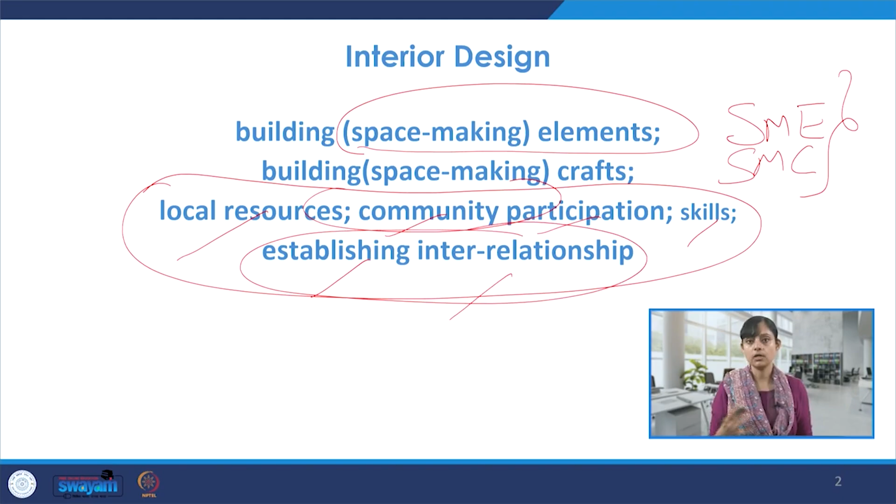So like I said, SME or building elements, SMC or building crafts, space making crafts, and whenever we talk about these and understand the conceptualization of space or interior architecture projects, we try to understand the role and contribution of all of these, and also the interrelationship among all of these put together.

So these are the contents. For space making elements, we had already started discussion and saw this table, but just to summarize again, we have architectural elements, interior elements, and ornamental elements. All of these interior and architecture elements put together make a space, and they are called SMEs or space making elements. These categories have been adopted from prior research, and it's also part of my PhD research at IIT Roorkee, where there are more details for anyone interested to look at.

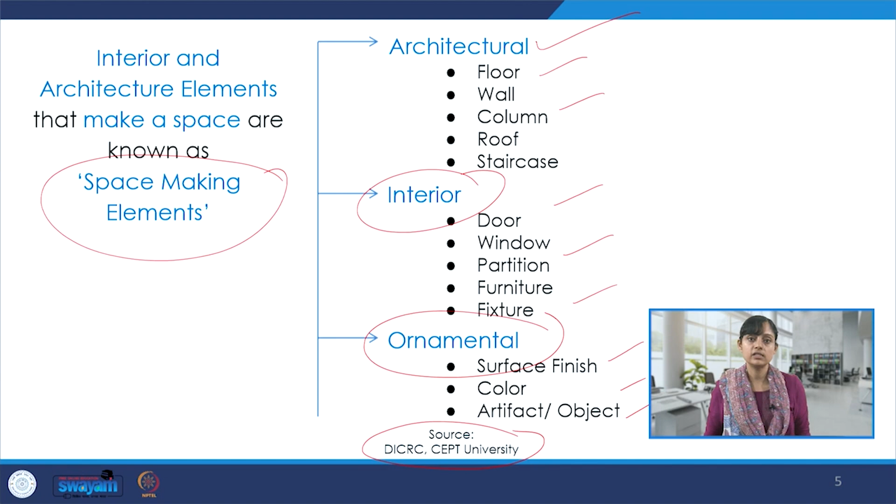Since we already discussed a lot about these elements, I'm going to talk a bit about some of their attributes and show some visuals, rather than the technical definitions we have already seen.

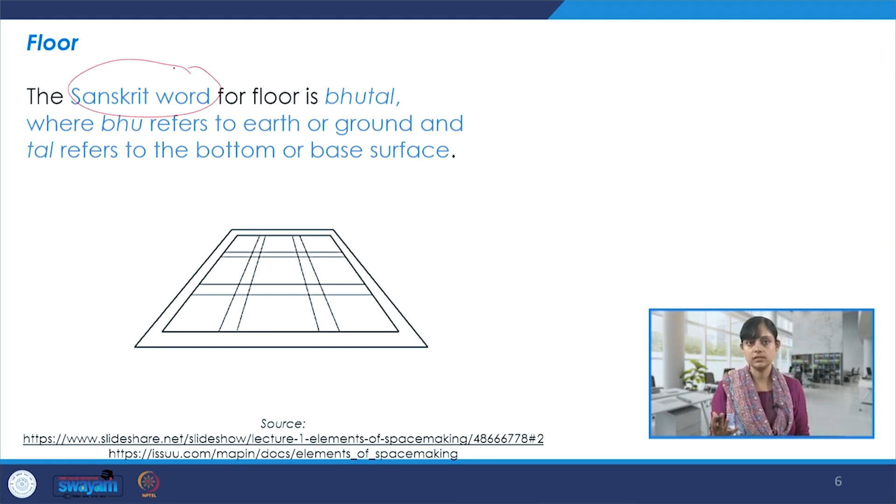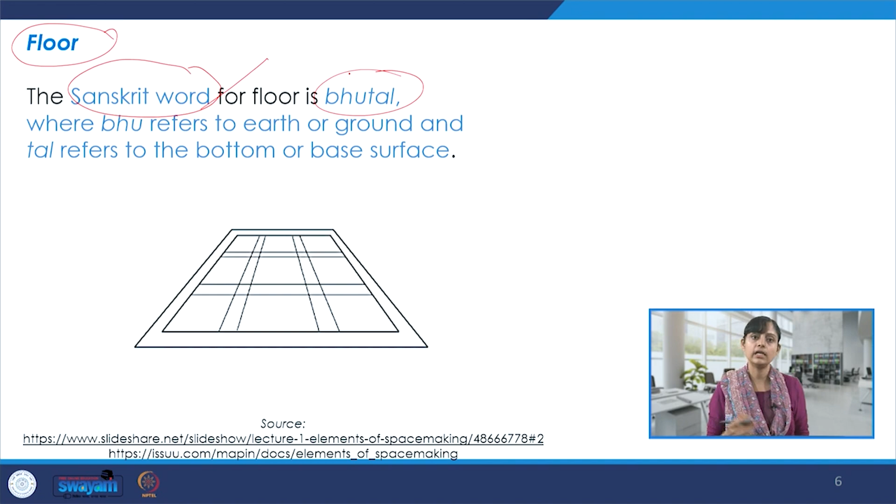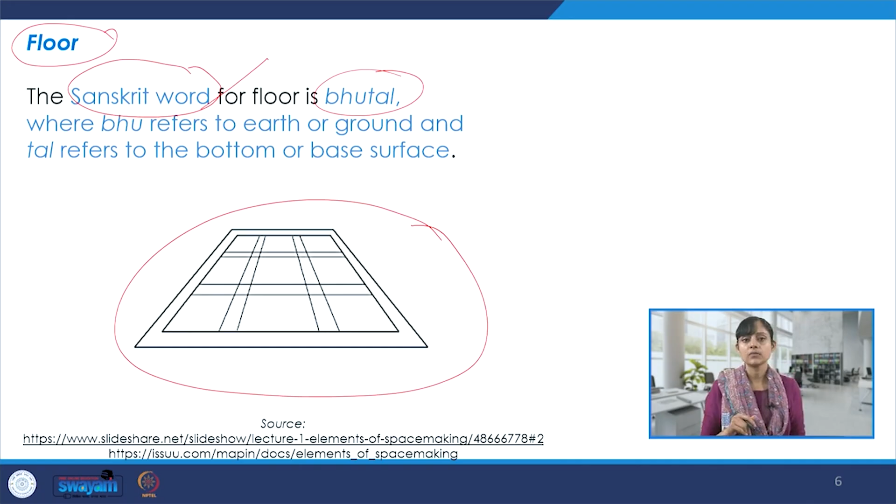So when I talk about floor, it's a very crucial element. If we talk about its origin, in Sanskrit it is derived from bhutal, where bhu refers to earth or ground and tal refers to the bottom or base. It becomes like an anchor point or reference, and we have to really see this as a very important element within interior architecture projects.

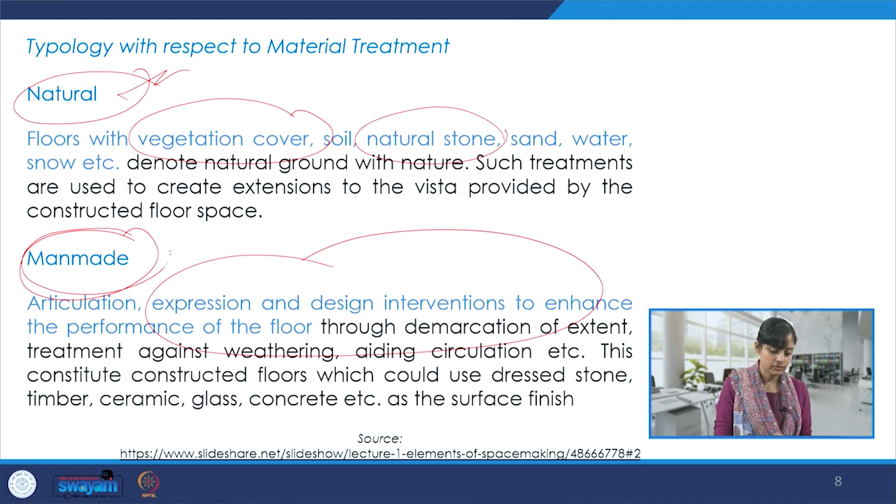It could be an unmodulated floor surface, very linear, consistent and uniform, or it could be something modulated with a play of levels. It could be something very psychedelic, very different from what we experience on a plane surface. It could be natural or man-made, with different kinds of articulation, vegetation cover as part of natural elements, or natural stone. We could design expressions, customize details, and do interventions as part of our skill sets to create different kinds of floors.

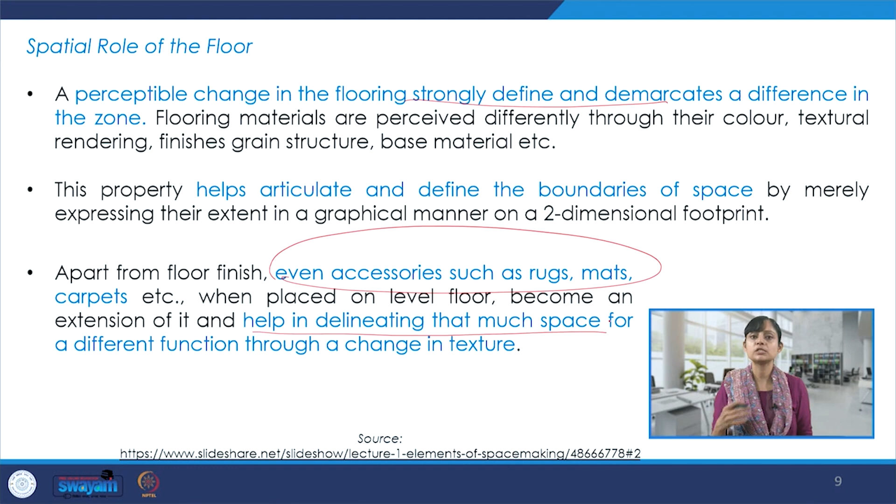There are different spatial roles that the floor plays. As we've already discussed, it strongly defines and demarcates different zones. It helps in articulation of spaces and defining boundaries within a space. Even accessories such as rugs, mats, and carpets help in delineating that much space for a different function through a change in texture or color.

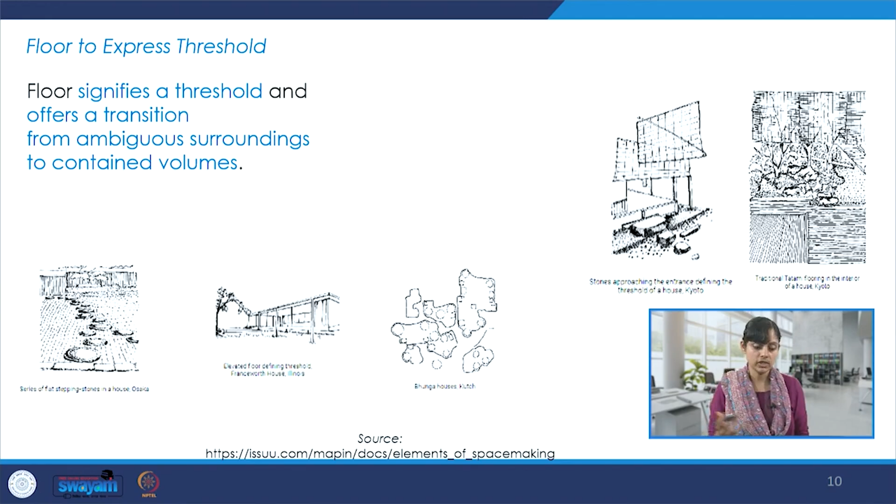There are different attributes these elements could assign to a space or project. For example, a floor could express or signify a threshold, offering a transition from ambiguous surroundings to contained volumes, like this series of stepping stones in a house in Osaka.

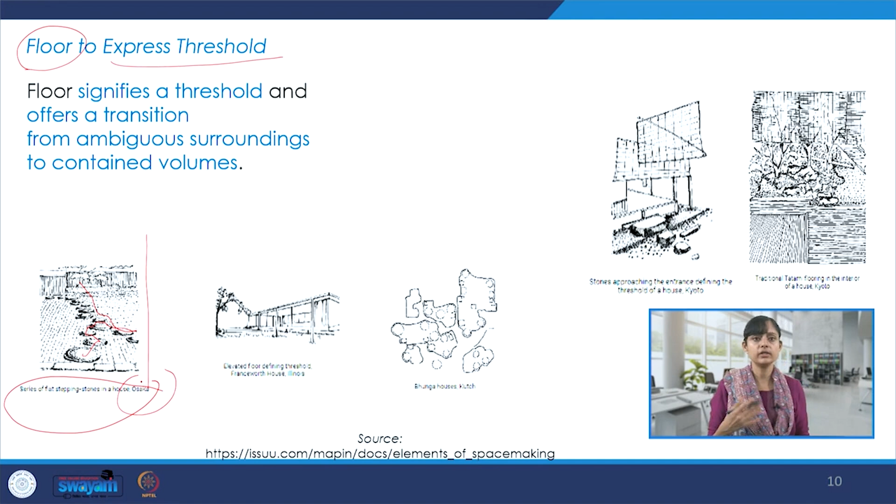So here it's again an expression of thresholds. This is an elevated floor defining a threshold, at the Farnsworth House in Illinois.

This is a Bhunga house of Kutch. We are seeing the plan. Here also we have very interesting details in terms of floor, where these stones approach the entrance. They make us approach the entrance and define the threshold.

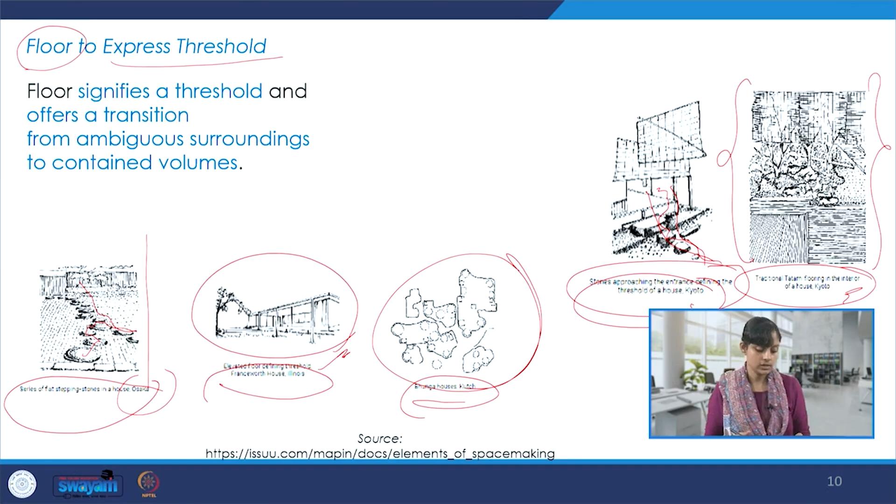This is a house in Kyoto. Here we see some traditional flooring in the interior house of Kyoto again, so it could express threshold and define volumes.

Then there is this application at Sangath, Ahmedabad, architect B.V. Doshi's office. Here we see how the floor is used for different purposes and what interesting role it has, defining a sequence of pause and movement. Without directly entering the office, one navigates through the space, following this sequence of pause and movement, and then is taken to the office.

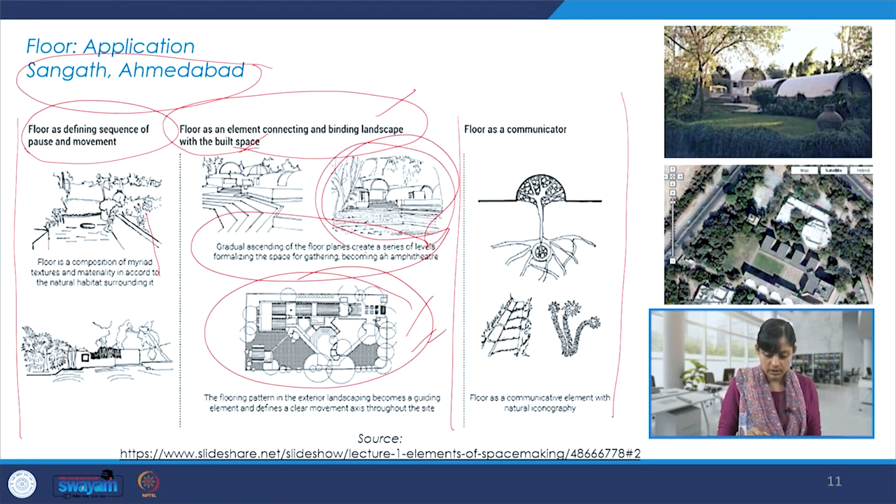That's also a sort of a journey, and floor plays an important role there. Floor again acts as an element connecting and binding the landscape with the built space. This is the exterior landscaping shown through this drawing and pattern, and here we see how it becomes a binder, cohesing the landscape with the built space.

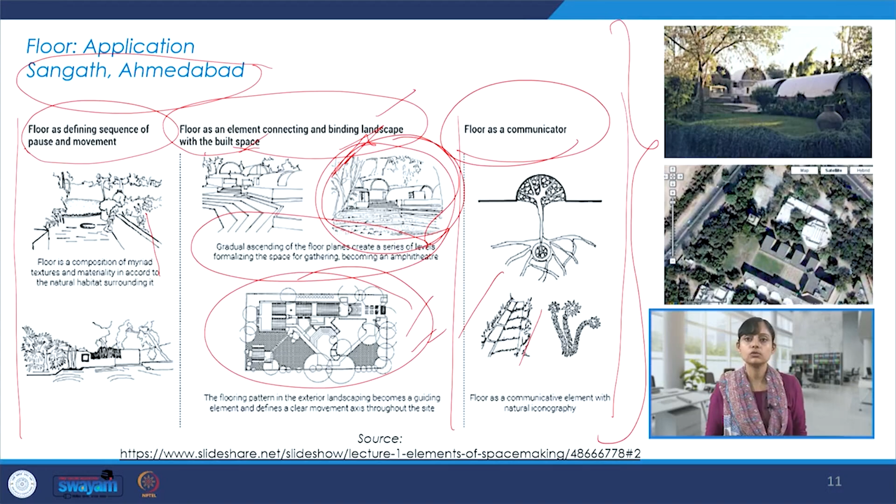Floor also acts as a communicator, the branching out of spaces, the kinds of stories one understands through these building elements. All of these are crucial aspects of design, also having philosophical underpinnings and some kind of symbolism and iconography, apart from the functional aspects. These are very interesting and important parts for a designer to understand.

This is the very famous Fallingwater in Pennsylvania, and here too we see how the floor becomes an important point, binding the entire exterior landscape with the overall built form and helping us navigate from one zone to another, through a series of pauses and movements and understanding a certain sequence within the space.

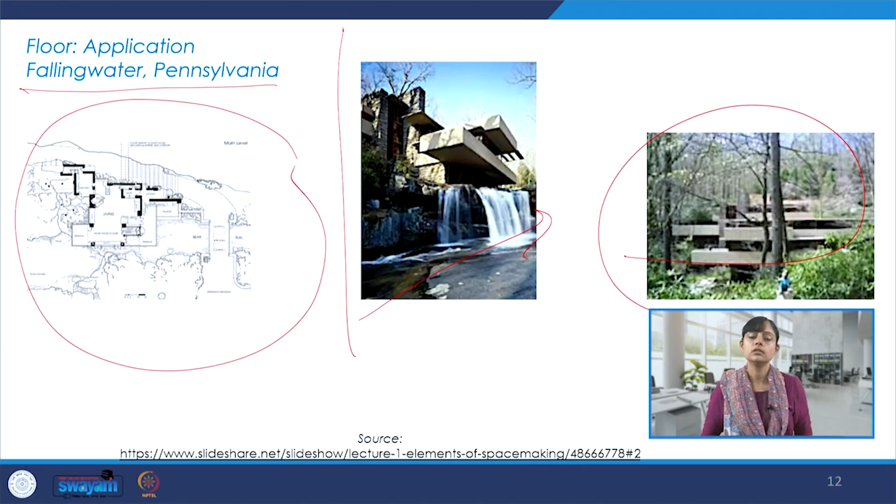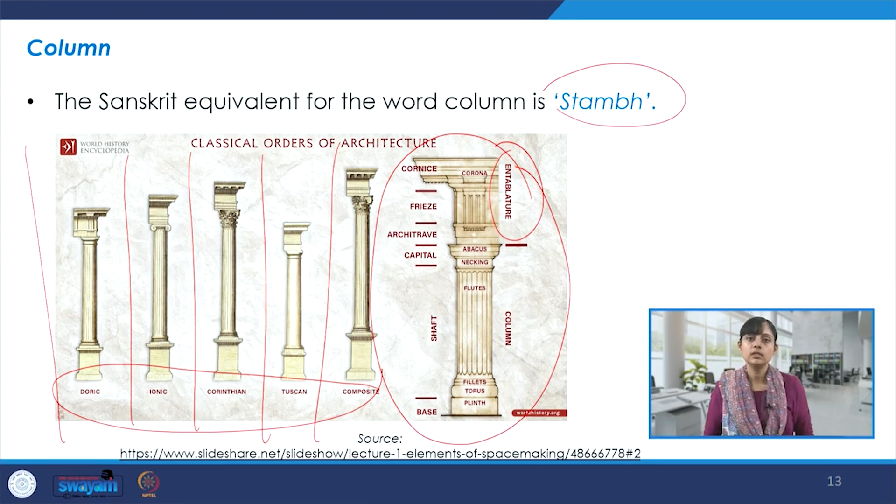Then column, and the Sanskrit equivalent is Stambh, and we already discussed the orders, the 5 kinds of orders. Here again we see these columns in place and the entire detail about the shaft, base, capital and entablature, and how they help conceive a space and what functions they do within a space.

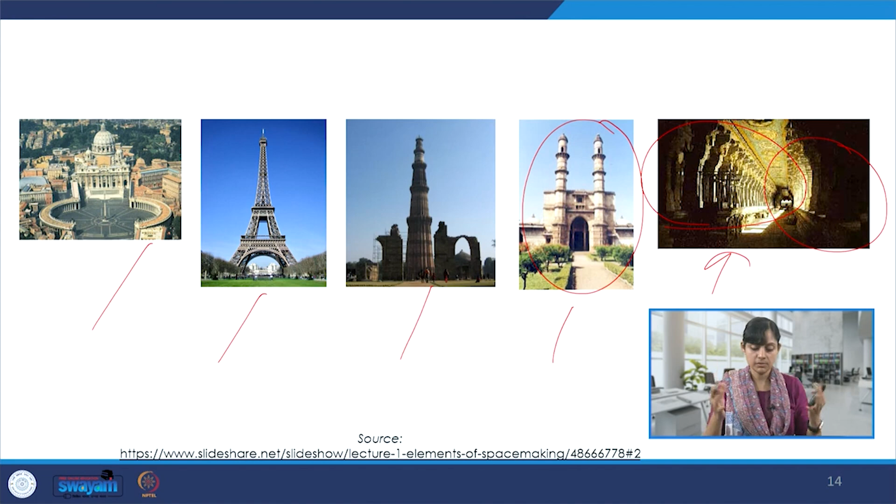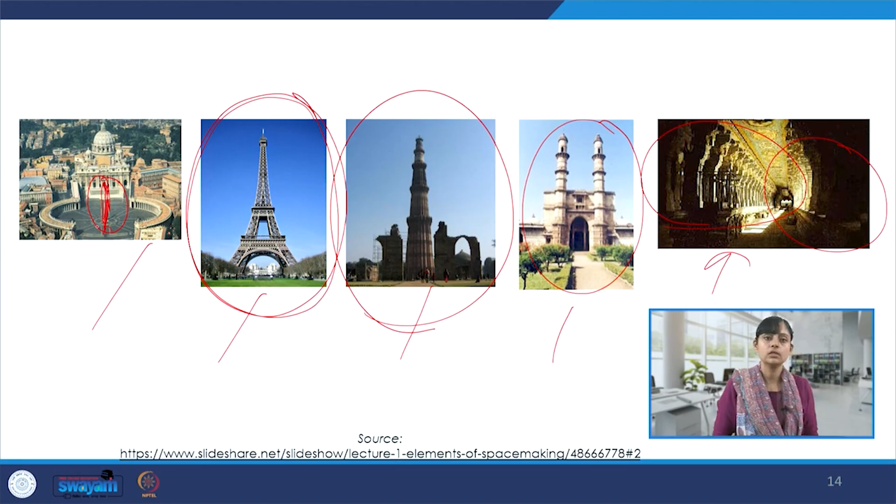Again we see some examples when we talk about columns. Here there is a repetition and a rhythm. Here we see these twin columns defining the grandeur and the main entrance, and of course landmarking. This is again a sort of landmark and a very historic example. And over here at the center, we see this interesting placement of a column.

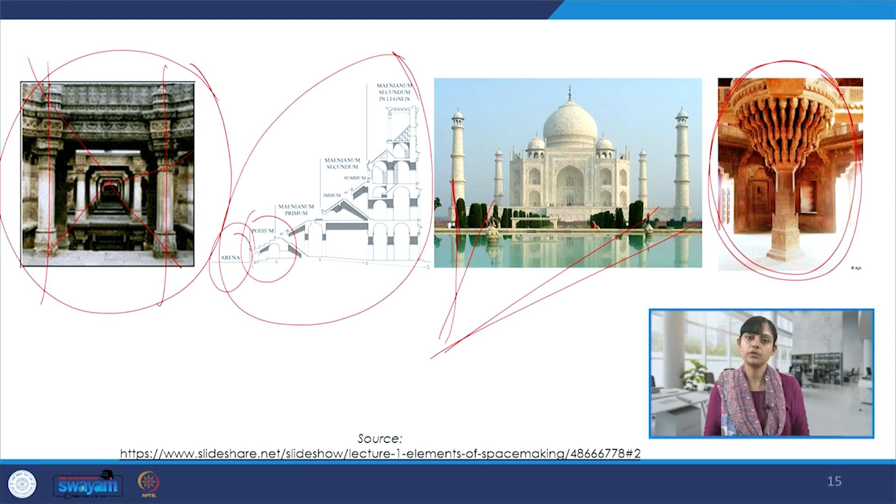Here again some examples, this is from Ahmedabad, and then you see the one-point perspective over here, a very interesting perception within a space. This is another example. Then we see the columns in the Taj Mahal, the minarets and columns, and of course a very interesting example like this. We also see contemporary examples like the Mumbai terminal and other columns used in contemporary projects, so they do a lot of different functions.

Then another SME is wall, and we see examples again. This one is from Gujarat, and again some very historical examples.

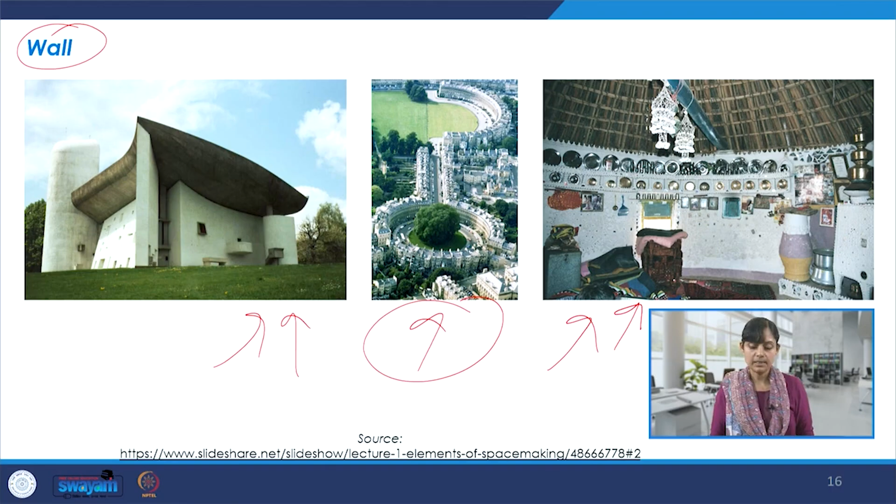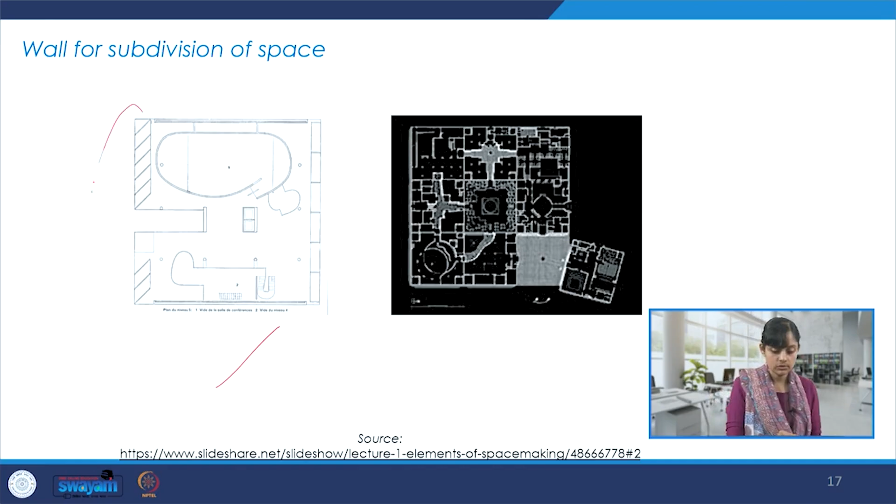Then again, what does wall do when it is about the subdivision of a space? So it has this attribute, and understanding the placement of walls helps us demarcate certain spaces, this zone versus this zone. And here again, within a walled city also, this sort of a grid and then the subdivision.

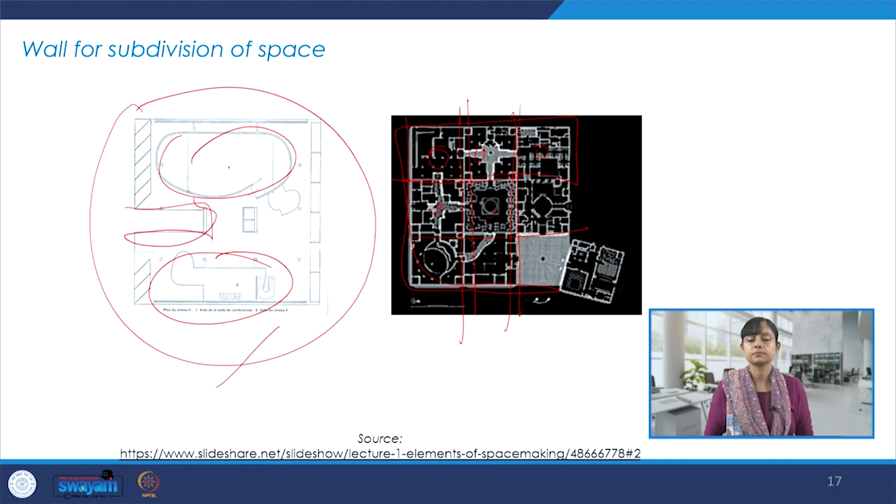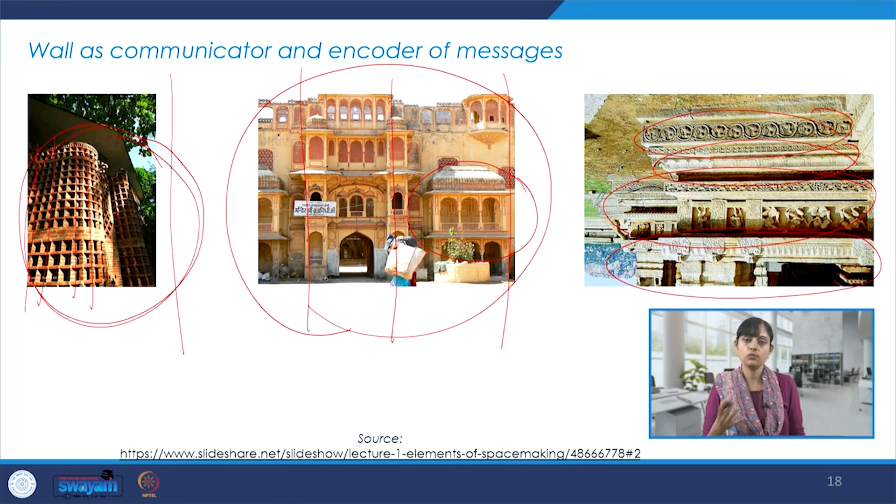Wall also acts as a communicator and encoder of messages. Here again it's a very porous surface we see, and this is the brick wall, done in a very interesting louvered pattern. This one over here again carries lots of messages, history of the place, important elements of a particular architectural style. Also, if there is any kind of epigraphical detail, something written or etched on the wall, or some kind of carving or motif denoting a certain meaning, those kinds of details also we see on wall as a building element.

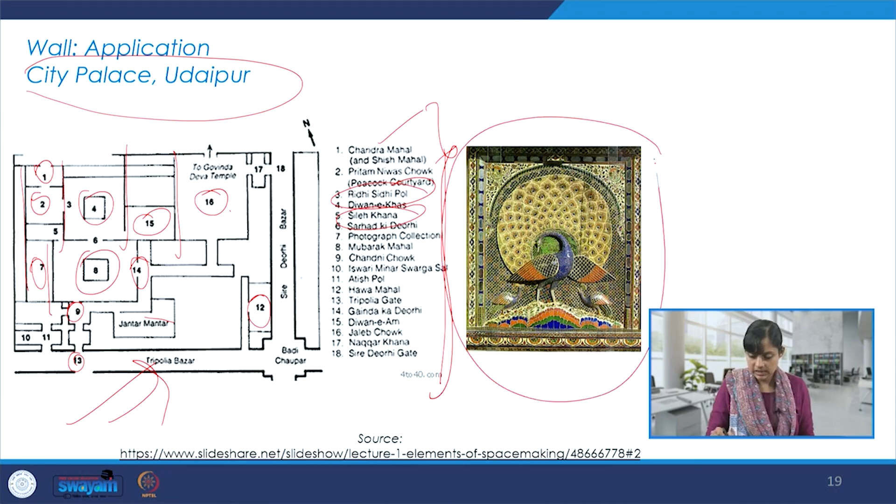And we see interesting details of mirror work and mosaic work or meenakari work within this palace at different eye levels on walls, which accentuate the space, creating drama and aesthetic. Plus it becomes a sort of communicator and encoder of messages from that particular time period, or where did this glass or mirror work come to India from, or whether we influenced it to be taken outside India, and so on.

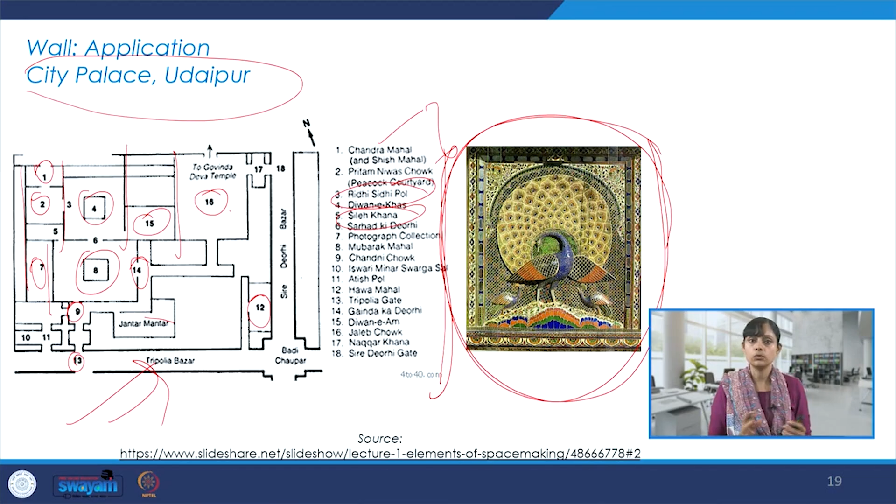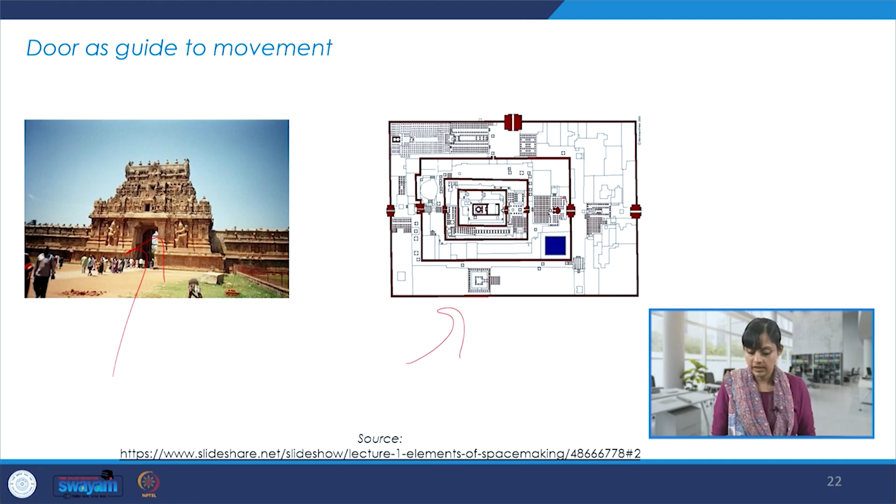Door also acts as a guide to movement, and it defines entrance, it defines movement, it helps us navigate. Within a floor plan, wherever we see door openings, it also gives us a sense of direction.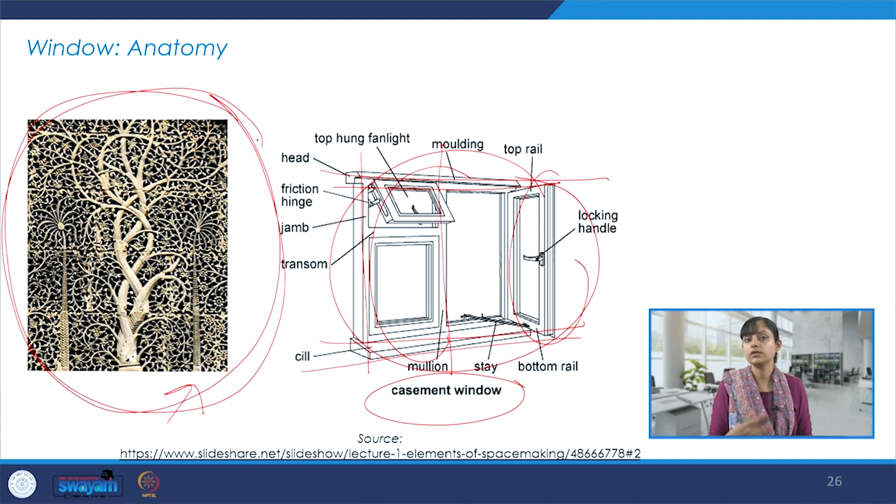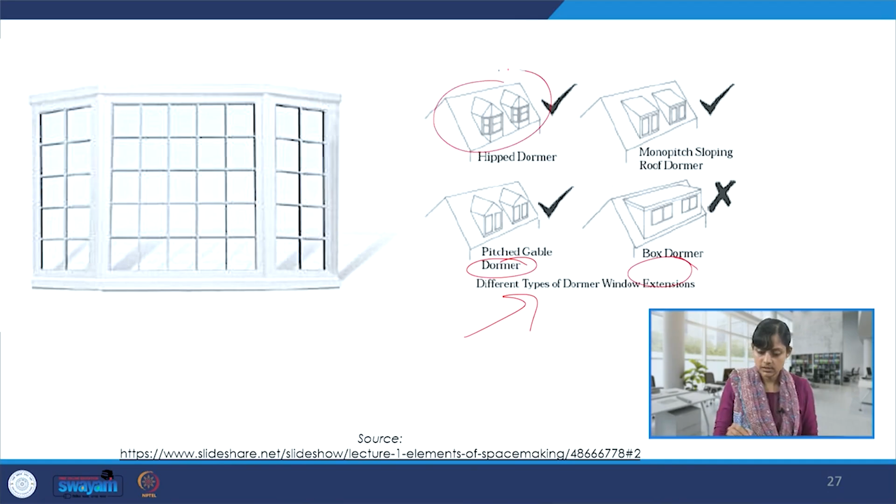Windows could be understood in terms of anatomy. It could be like a perforated window, or it could be like a casement window, which has a proper structure and system in place, where we have the top rail, bottom rail, and all these details. Or it could be something very abstract, intricate, with perforations, with lots of motifs and patterns. So, perforated. Then there are other examples: this is a dormer window, here we see the roof and the window at an angle, and this is like the bay window.

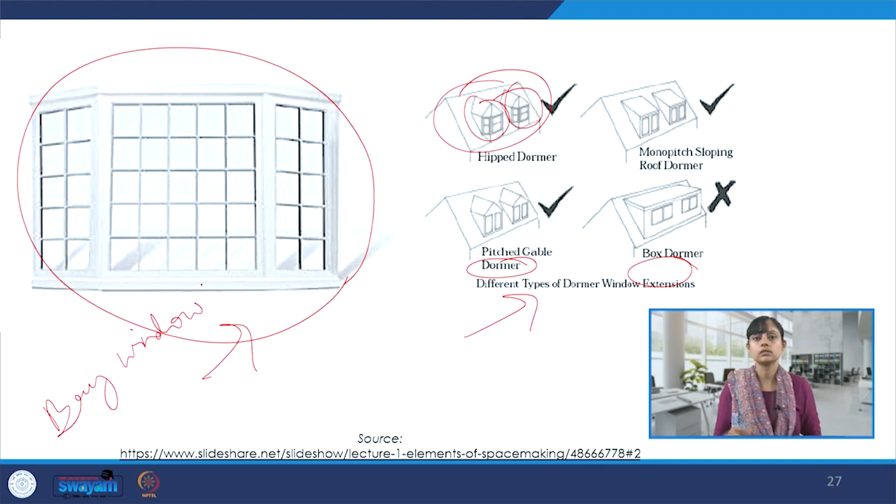So different countries, different climates, according to different needs, there can be different kinds of windows and openings. There are again a lot of attributes and a lot of qualities and characteristics that a window could serve the purpose of, and it could be known for.

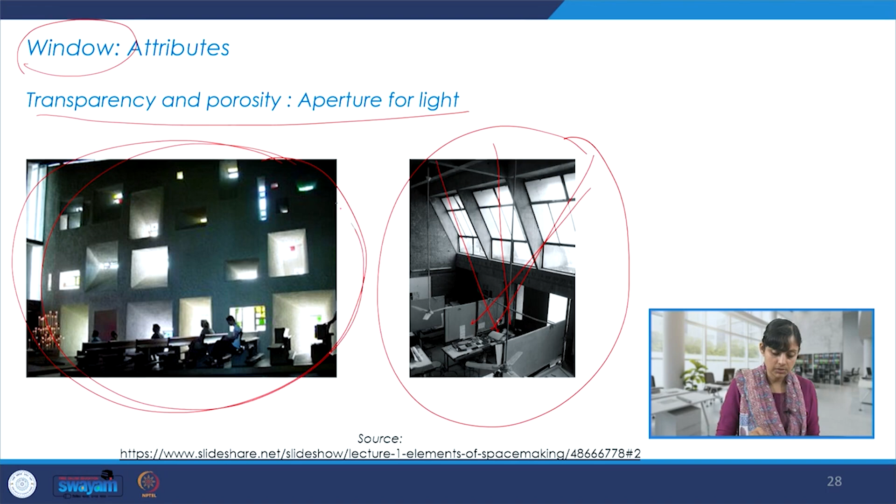So here this example, this is from CEPT, this is the north light, this is the window opening over here. So it could act as an aperture for light, it could have a play of transparency and porosity, it could again create a drama in the space, while simultaneously obviously offering the function.

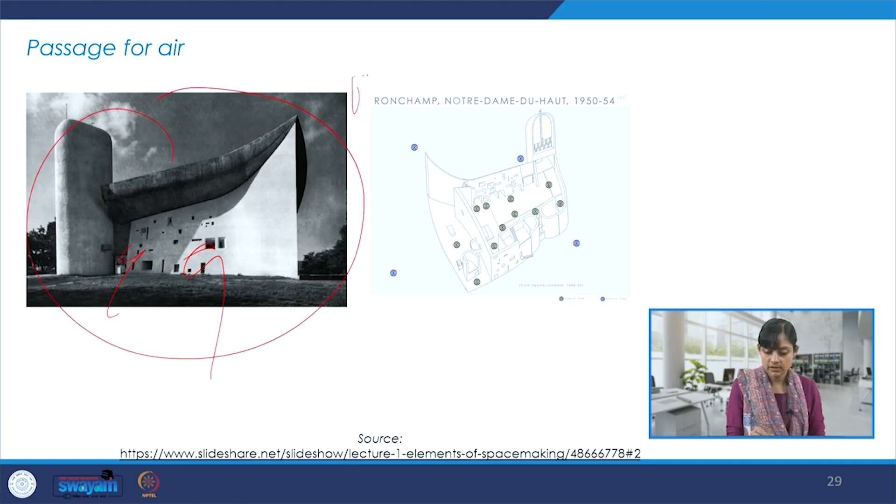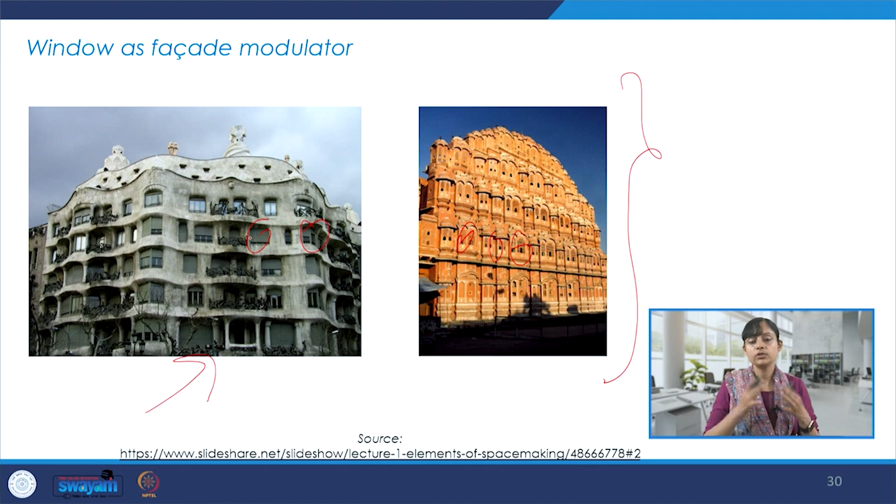It could also act as a passage for air. So here again, this is the very famous Ronchamp project, and here we see it act as the passage for air. Again, as a facade modulator, like we talked about the door, here if we see Gaudi's architecture, and here Hawa Mahal, and how these window openings become facade modulators, and they modulate the entire facade or the surface on which they are placed.

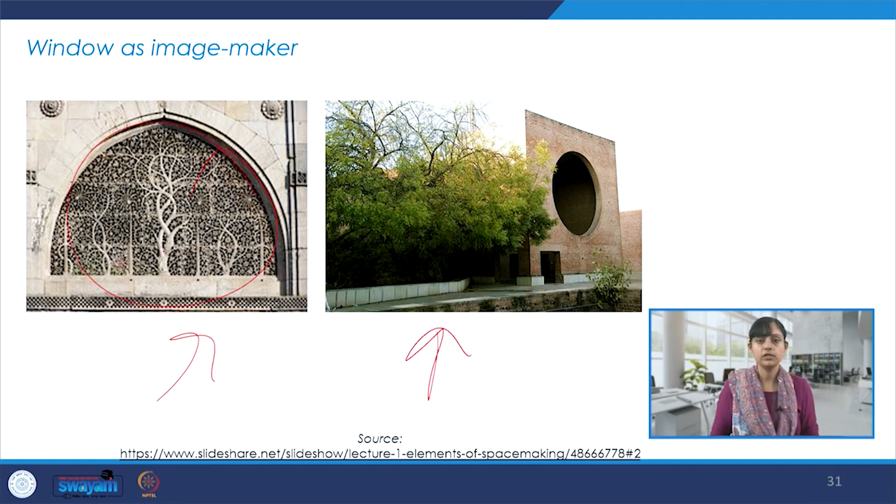Now let's talk about the stair. So the origin of the term lies in the Old English or Old German word stigan, which means to rise, and there's also a Sanskrit counterpart, which is padasat.

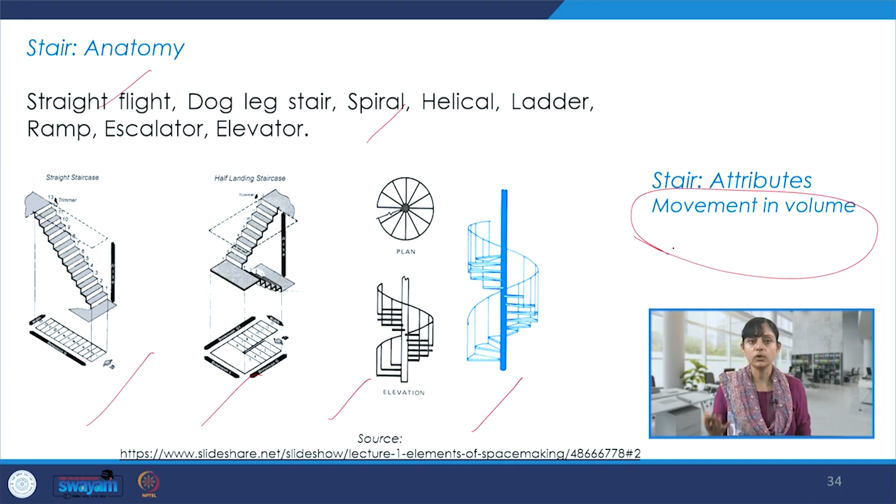So stair has different anatomy, and it has different attributes by virtue of that anatomy. It could be a straight flight, it could be spiral, helical, and so on. These are some of the examples, and it sort of assigns movement within a volume. It could also be seen as a pedestal, giving this kind of a pedestal or plinth to the built form and creating an experience for the user to arrive at a certain point.

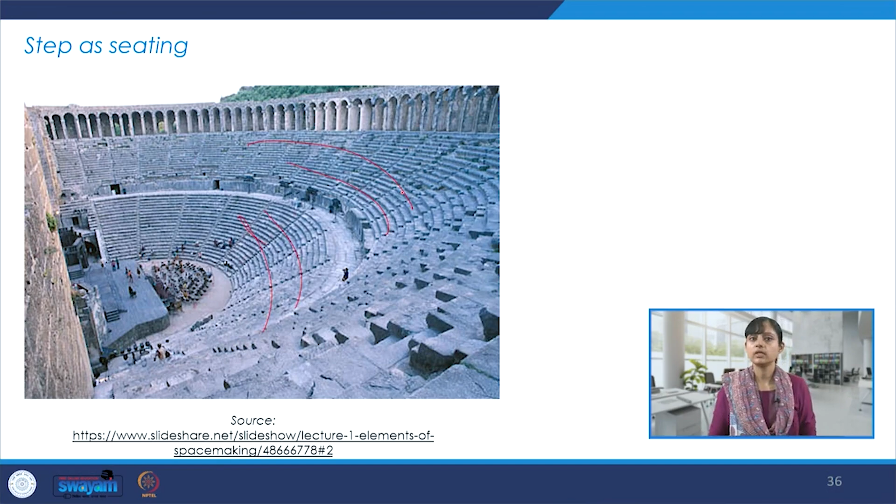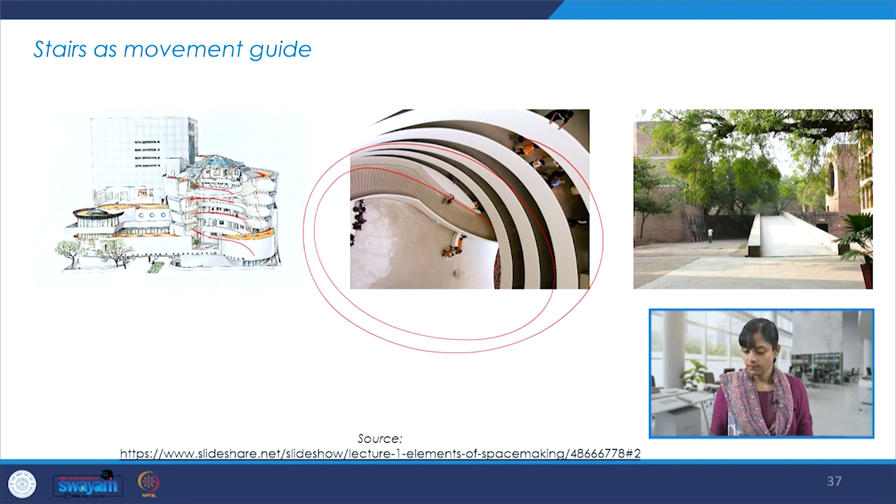It could also be used as a sort of seating. So there are different kinds of attributes for steps and stairs, as a movement guide, how we are navigating within the space over here. So in this interesting project, it becomes a part of the spiraling gallery, and something like this, also in the form of a ramp.

Something which becomes like an aesthetic element or part of an industrial design vocabulary, even that is possible. So this is Centre Pompidou.

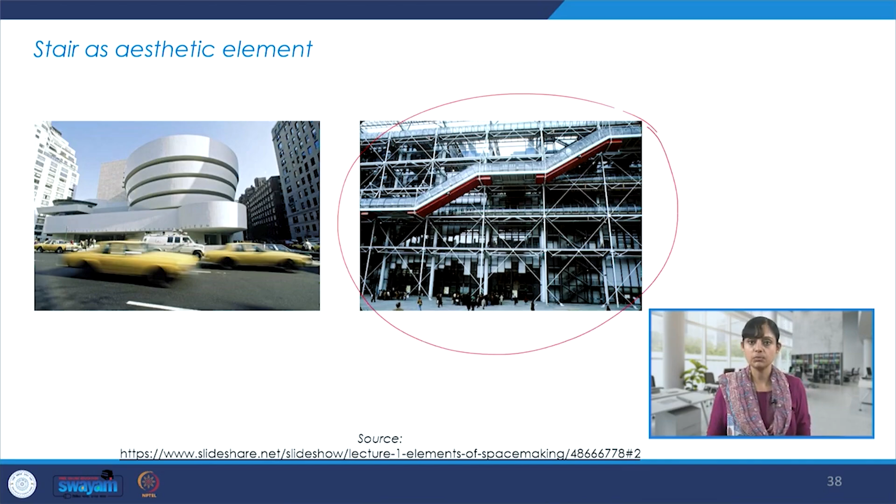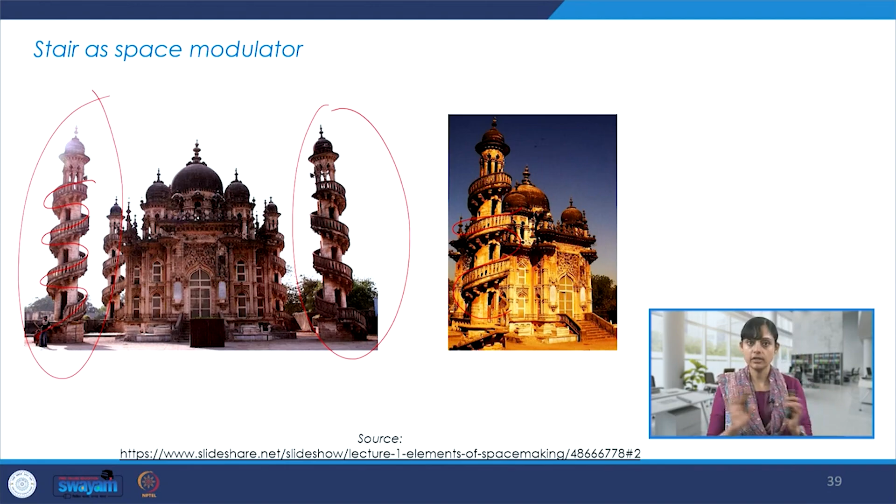And again, as a space modulator that we have been talking about, or a facade modulator, here also, a spiraling staircase along this minaret or these sort of towers or turrets gives a very interesting modulation to the entire space and the surface.

Then we have the roof. Roof is again an important building element, and it has been referred to as a ceiling in Middle English terms, deriving its roots from Latin, often referring to heaven. There is also an English and Dutch term for this, where they refer to it as cabin.

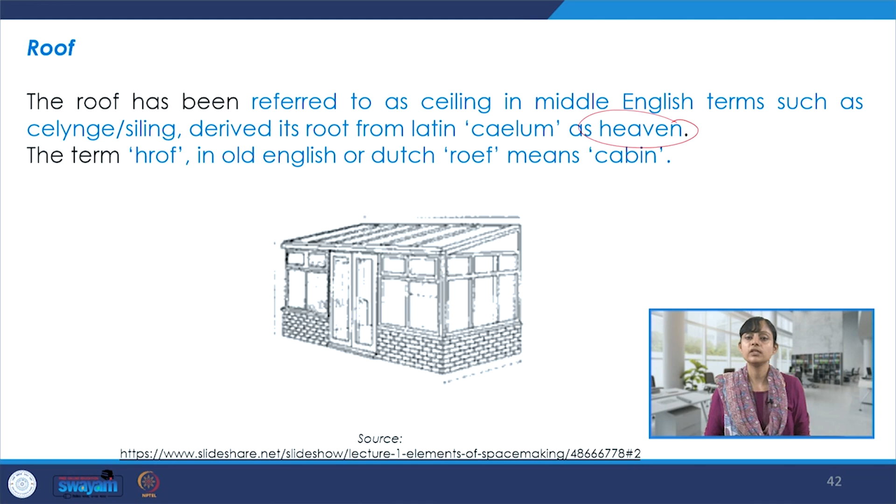Roof also has different kinds of anatomical forms. It could be a flat roof like a slab, or an inclined roof, curved roof like a parabolic one, or dome or vault. It could be a folded plate roof like corrugated sheets.

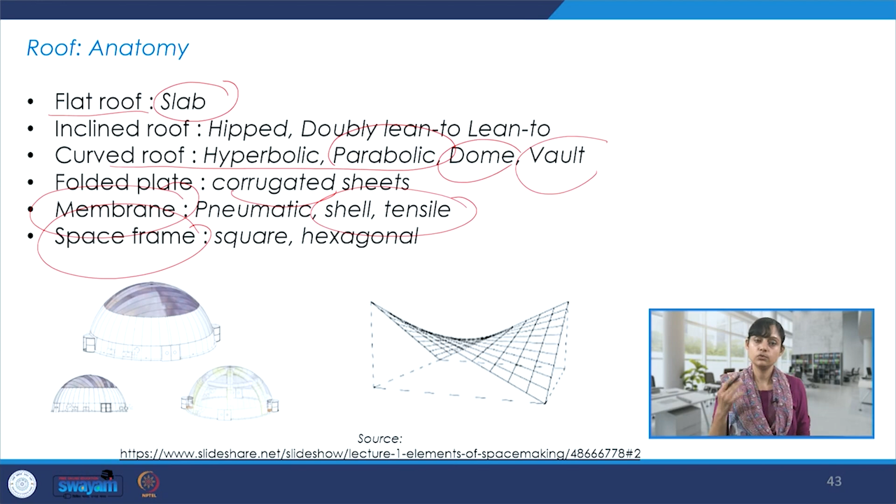It could be like a membrane, a shell or tensile roof structure, or a space frame, hexagonal or square, etc. So actually the roof anatomy is very fascinating, and it could create very interesting vocabulary to the entire design of the built form of the project being worked upon.

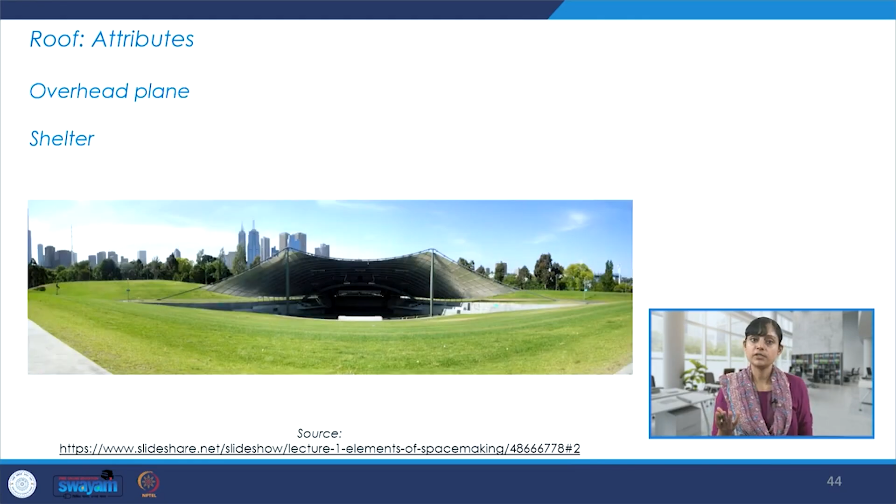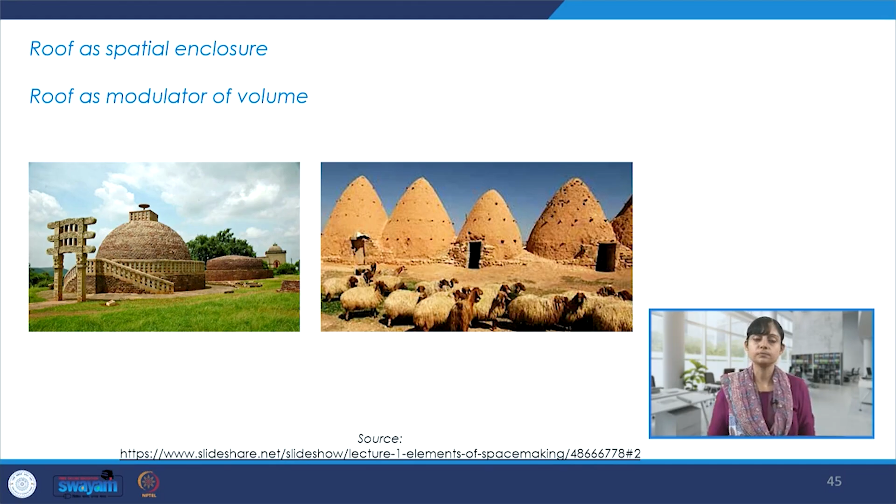It has several attributes, it acts as a shelter, sometimes as an overhead plane, and it provides a spatial enclosure. It also acts as a modulator of volume, sometimes as an image maker, encoder of symbols, iconography, communication, storytelling, all of that.

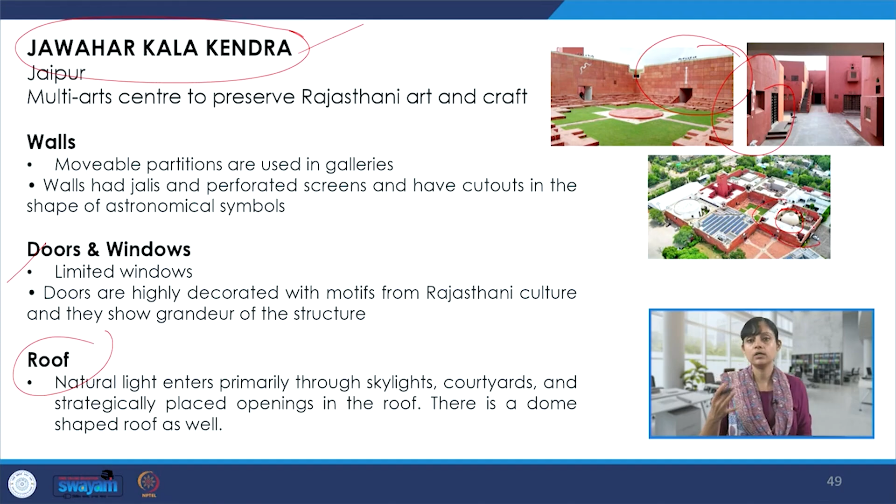There is one more case study where we have seen these different building elements put together in a very interesting way, the very famous Jawahar Kala Kendra, with different kinds of walls, different kinds of openings, and a very interesting roof form. When we especially go within the interior space, we see flat roof, domical, and vaulted forms, all different kinds of examples within this entire project.

So skylight, courtyard, like this is from the interiors. Once you are situated inside, near the entrance, and then you look upward. Very interesting material palette, color palette, different symbolism again.

Defining the space, defining the entrance, natural stone, color palette, and the natural patina of the stone, how it is used to the advantage of the user experience and enhancing the built form.

Now continuing with the space making crafts, since we already had a very elaborate discussion on the classification of these crafts and what we mean by SMC, these are some of the plates or inventories that I have tried to put together here as examples.

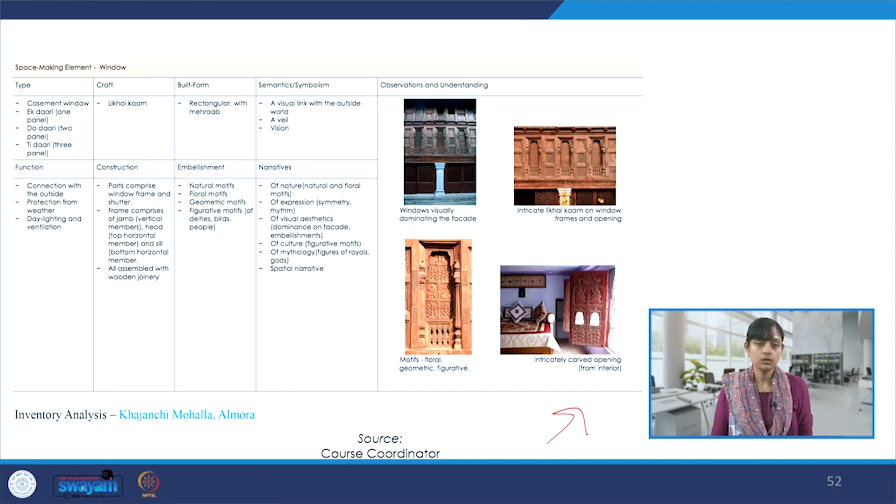And these were developed by me as part of my PhD that I submitted at IIT Roorkee, and defended at IIT Roorkee. So let's say we are talking about a building element, window, and this is one case study from Uttarakhand, a place called Khajanchi Mohalla, Almora.

So now if I have to analyze this building element in terms of what typologies or types of windows I see here, I see casement windows with one panel, two panels, or three panels. The craft that I see on the window openings is likhai kaam, which is carving, wood carving precisely.

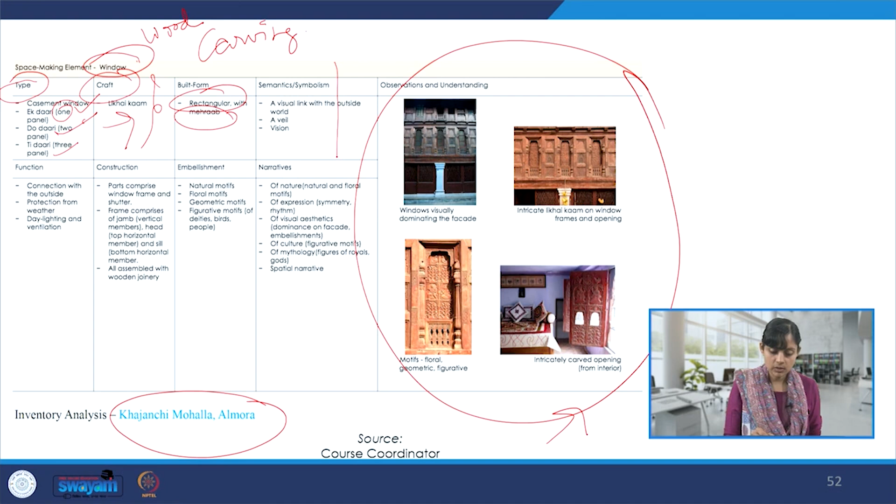What are the build forms associated with these openings? Rectangular, and somewhere there is also a mehraab, with symbolism and semantic aspects also assigned to these openings. So it acts like a visual link with the outside world, sometimes a veil concealing things from the outside world, and so on.

What are the different functions? Protection from weather, daylighting and ventilation. What is the construction like, what are the different parts? What if I have to break this opening into its constituent parts? And then how does the assembly happen?

So when I'm showing these examples, and as I said in the beginning, whenever we are going to talk about SMEs and SMCs, there is of course a profound role of the makers, their skills, their understanding of this material - they know it like the back of their hand.

How things are put together, what is the joinery, how does the assembly happen, what are the different attributes of these elements and crafts, and what do they convey, what is the semantic or symbolism behind them, and what is the actual function that they fulfill, what is the form like, whether it's rectangular or any other kind of form. So this is sort of putting all that analysis together.

So what are the embellishments that we see here on these openings? Natural motifs, floral motifs, some geometric motifs, also figurative motifs. And what are the narratives or stories that we get to know through these window openings in Khajanchi Mohalla Almora? So, narratives of nature, of expression, of culture, mythology, also spatial narratives. We understand the space and this entire residence also through narratives which are carried by these openings.

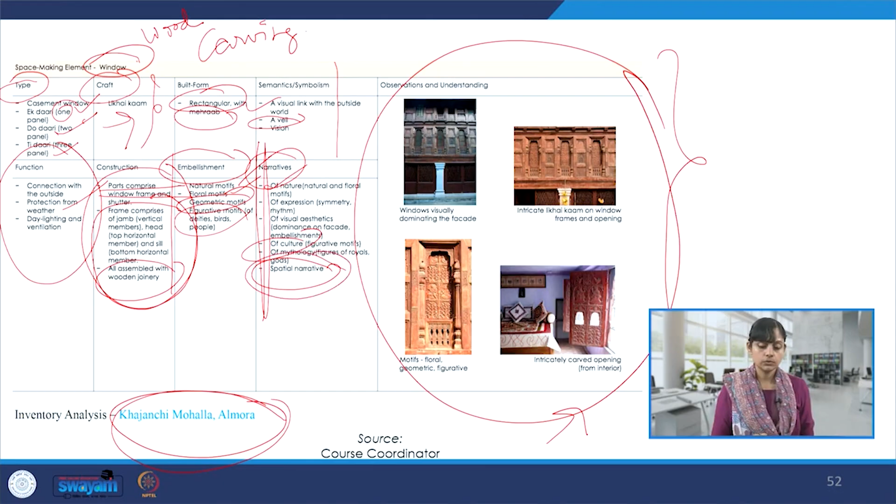So, here this is like one complete inventory where we see a building element, craft associated with it, and all the details that I just discussed.

This is another one where we see the element door, and here we see the element wall. So if I talk about door, we see both likhai kaam, which is wood carving, and then aepan, which are the ceremonial paintings. We see both these crafts over here. So one is more like a narrative craft and one is more like a building craft. So SMC and SNC, those two we discussed, and we see both the examples here.

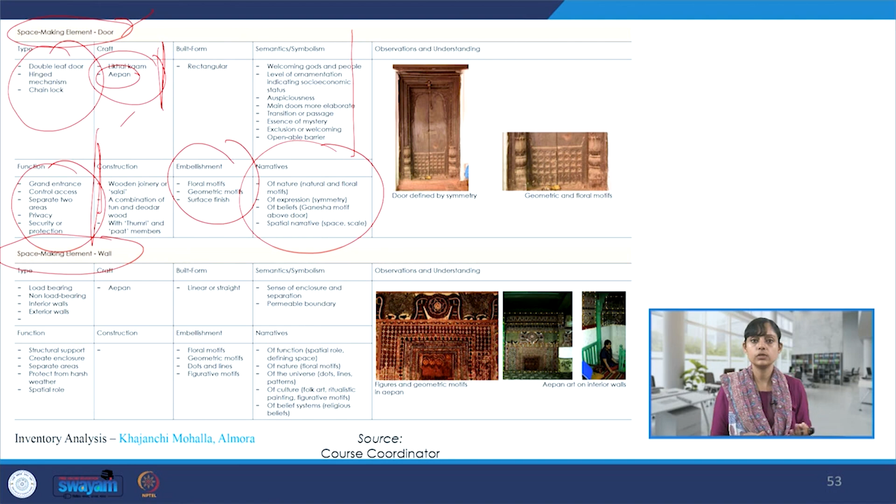What are the types of these doors? That also is mentioned again. Symbolism, what are the narratives they communicate or encompass, embellishments, how the construction is done, and what all different functions do these doors that we see in this particular house, which is at least 300 years old, and more similar examples in this entire mohalla. So we see this kind of attributes and interrelationship between all these aspects that I am talking about.

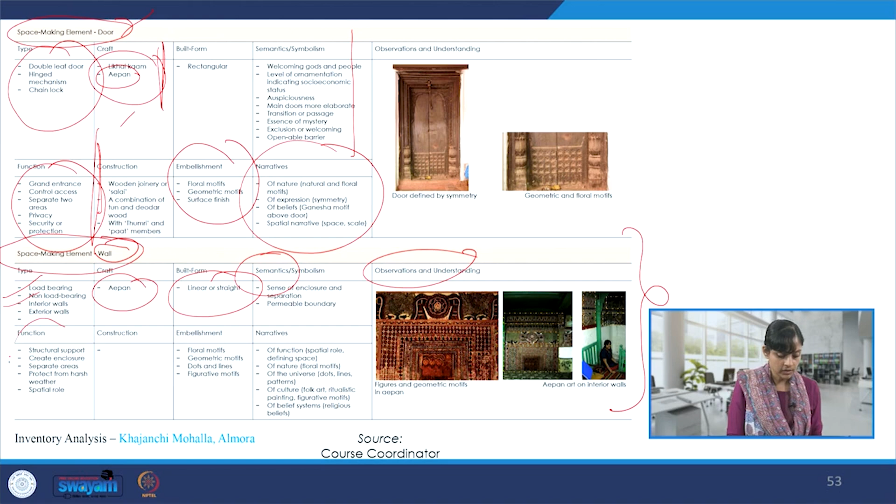Then the wall, which is again an important building element, type, load bearing, non load bearing, interior, exterior, what craft goes on it, what is the built form, semantics behind it, some observations which are put here in the form of images, different functions, embellishments, and again the narratives.

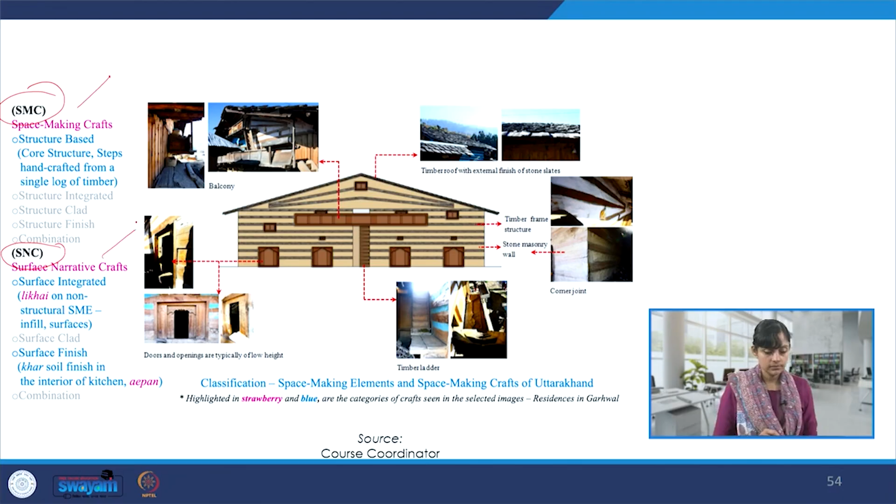This is another sort of inventory or analysis where again we have tried to highlight for you the space making crafts and the surface narrative crafts. So here we see, this is one example, a residence in Garhwal, and here we see stone and timber, which is used in alternate bands. And this side of the world, it is famous for its Koti Banal style of architecture.

So different building elements like balcony and roof, staircase, walls, and we see different kinds of crafts over there in different intensity. So we see some structure based crafts, core structure, the steps which are handcrafted from a single log of timber, and we see some combination of that.

We also see surface narrative crafts like this kind of carving which is not structural per se, but there is some carving which is integrated on the surface, and there are some kind of objects of use that we also see inside these houses. They are there on the other plate.

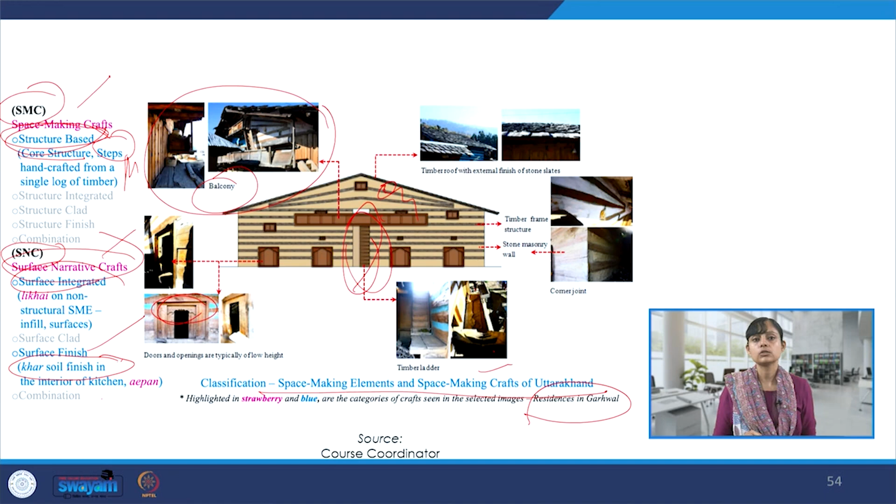And there is the surface finish, so there is this local soil which is known as khar soil, and for the finishing of the kitchen it is used for the finish. So that's in the interiors.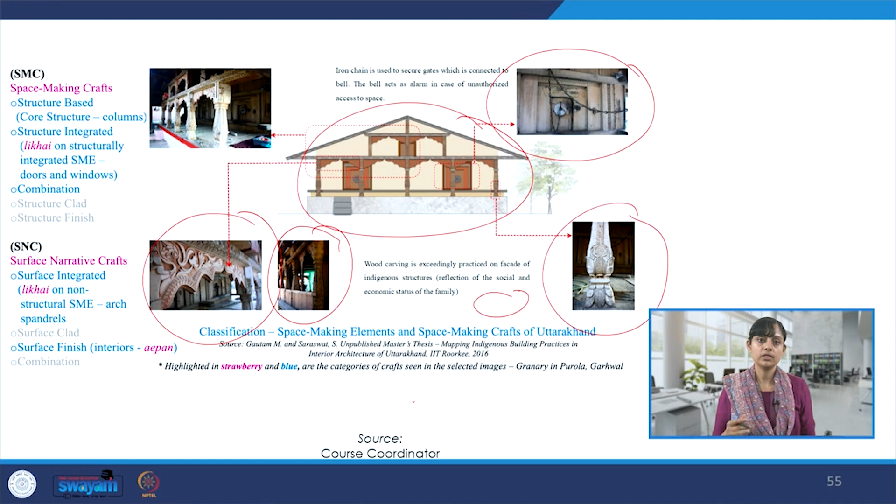This is another example over here, and here also we have tried to understand different kinds of building elements, column, arches, and what kind of material palette goes into making them. Also, there was an in-depth analysis about the community of makers and how these things are made and in how much duration of time. So I cannot discuss everything here, but again, I'm just trying to emphasize on this interrelationship between all these aspects that I began my lecture with.

And so here also we see space making crafts, structure based, which is the core structure of the house, and the columns. There is structure integrated wood carving that we see here. There is some kind of combination that we see here. There are also surface narrative crafts that we see, not the structural part, but some kind of integration. Like here there is a band of carving, which is just a surface integration. In the interiors, we also see the aepan, which is like the surface finish.

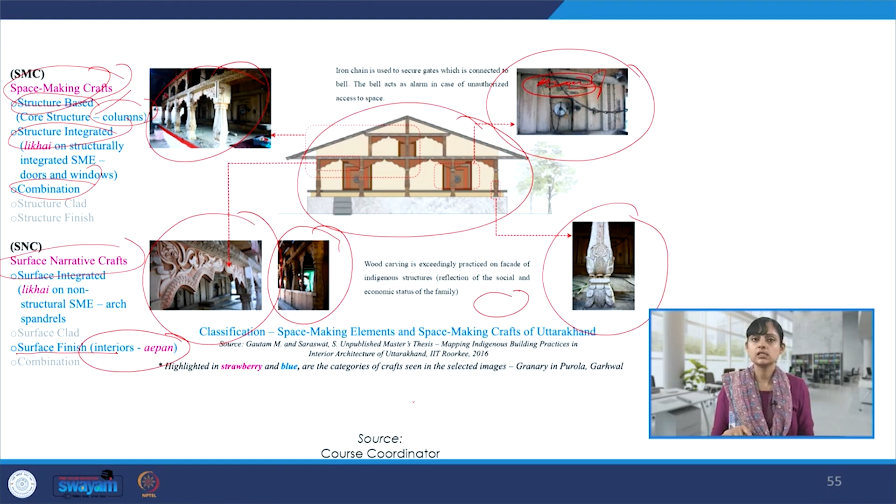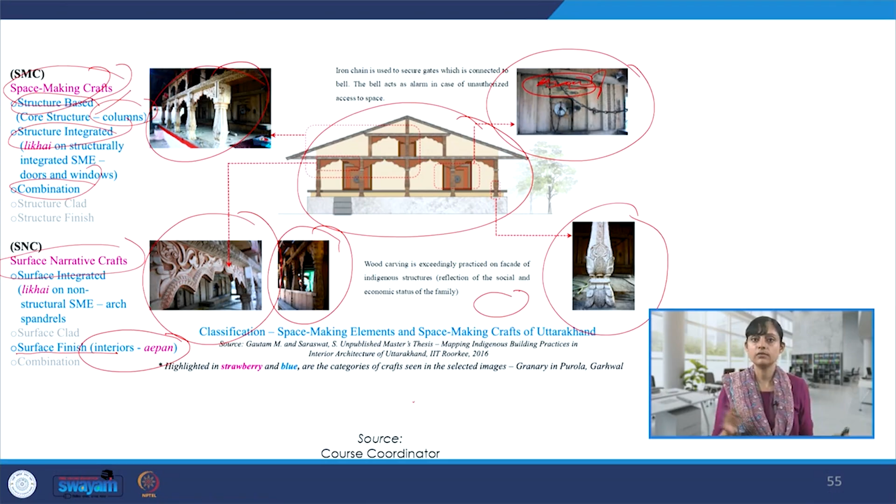So of course, this analysis, as I have been discussing, there is a reference to the work done at CEPT in the context of Himachal Pradesh, and then the research that I have done in the context of Uttarakhand, and we have just tried to put examples from both.

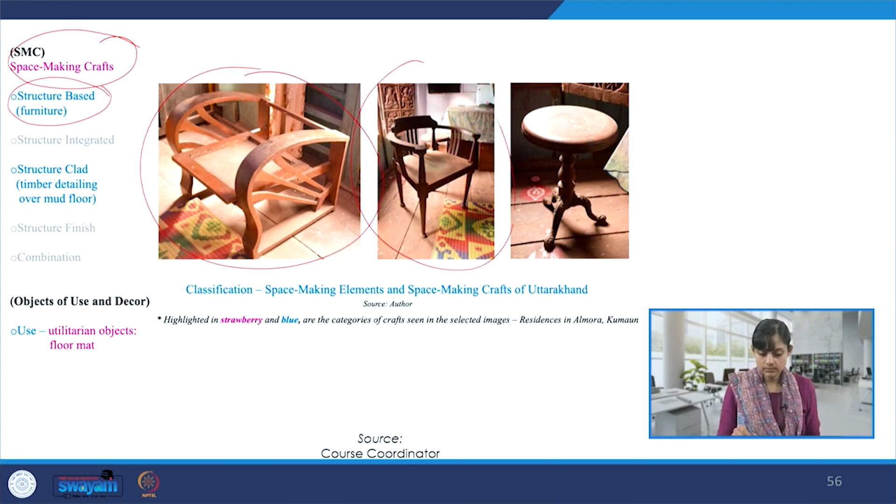These are again examples where I'm talking about space making crafts and structure based crafts, and these are seen in the case of furniture. So furniture carries dead load and live load, and it's quite structural in its design. So we see those examples.

We also see structural cladding, so there is timber detailing over the mud flooring. So those kinds of details we see here. There are also objects of use, utilitarian objects like floor mats. So we see all those kinds of examples.

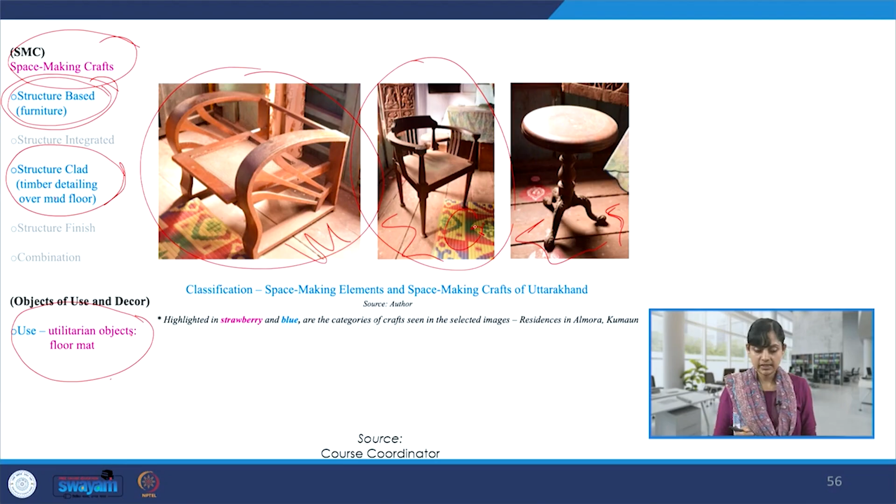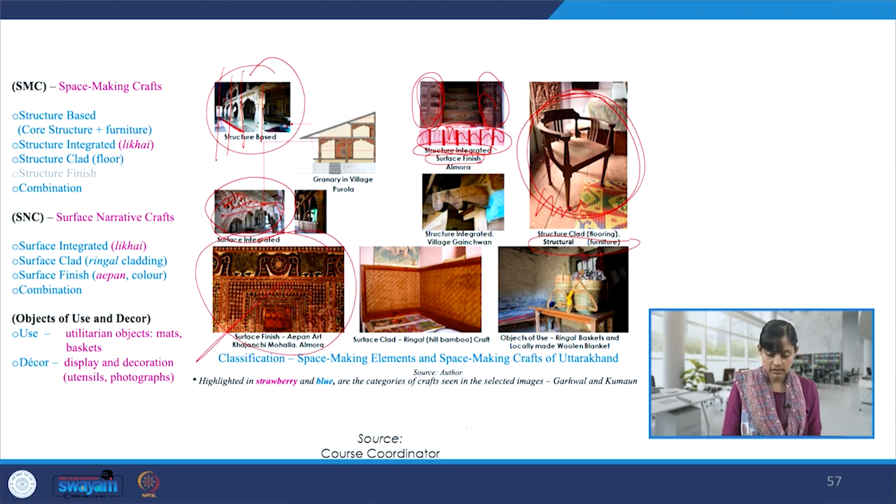Here we see the structure based craft in terms of the core structure and the design of the columns. Here we see surface integrated craft, so some carving but surface integrated. Also surface finishes here that we see the aepan art. This is surface cladding, done out of ringal, which is a species of bamboo found in Uttarakhand. So this is just the cladding part. And again the objects of use.

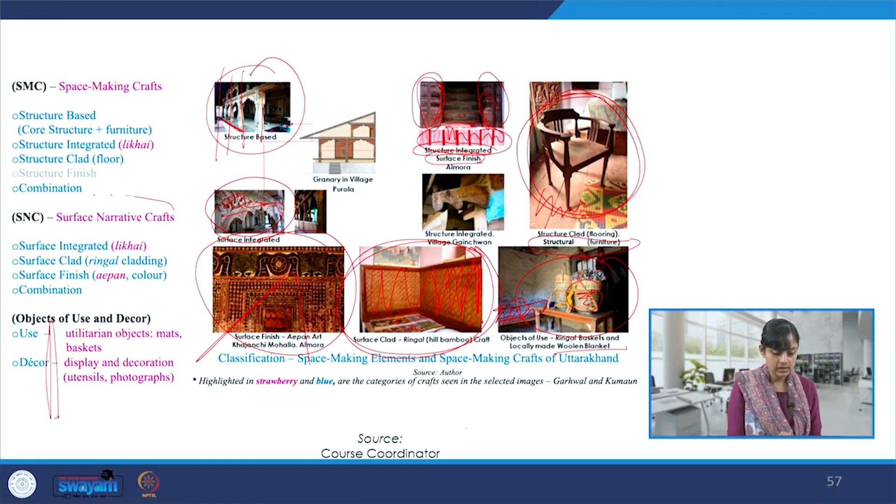This is also made out of ringal. So this paneling that you see over here and also the basket, it's done out of ringal. And there are also the woolen blankets which are locally made. So we see objects of use and decor, surface narrative crafts, and space making crafts. So all the categories more or less are seen here in this inventory.

So we could analyze interior architecture projects in terms of different building elements that go into the making of them, and then what are the different space making or building crafts that we could see at different levels and different capacities like I was explaining. And then how, with the help of the profound experience of these makers and their skill sets, the tools and techniques they use to create these kinds of details, how all of these put together within an ecosystem, connecting all the dots, can help us make and enhance a very interesting interior space or interior architecture project.

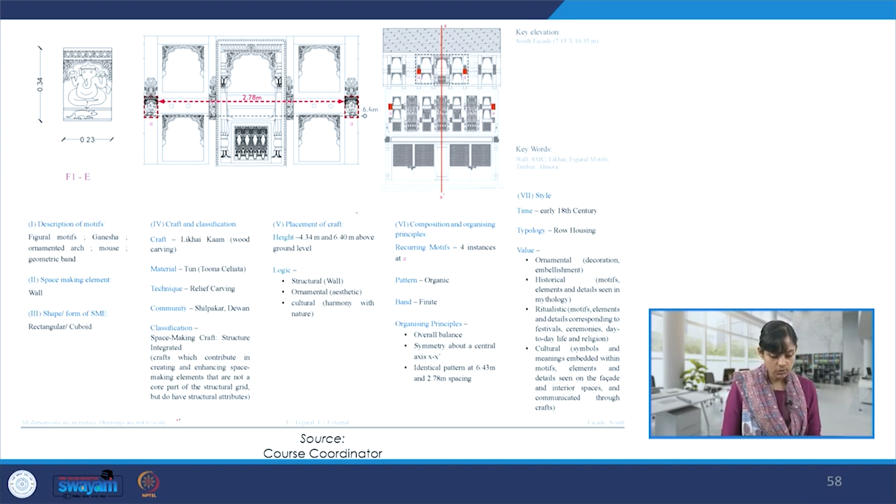This is one more interesting inventory which helps us understand how we can understand the composition within a space, a facade, or a plane, by decoding what kind of crafts go into the making of it, what is the interval at which they are placed, what are the different kinds of motifs used, at what eye levels are they put, are they recurring, is there a rhythm. So we can understand this entire composition.

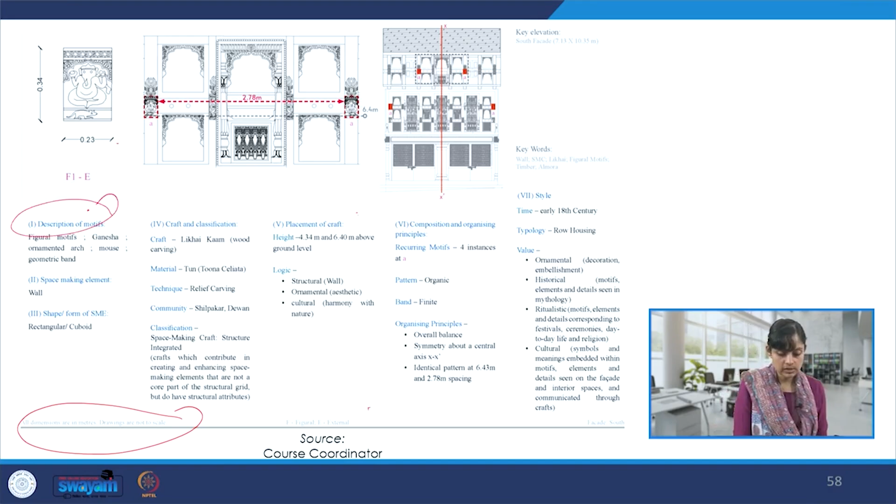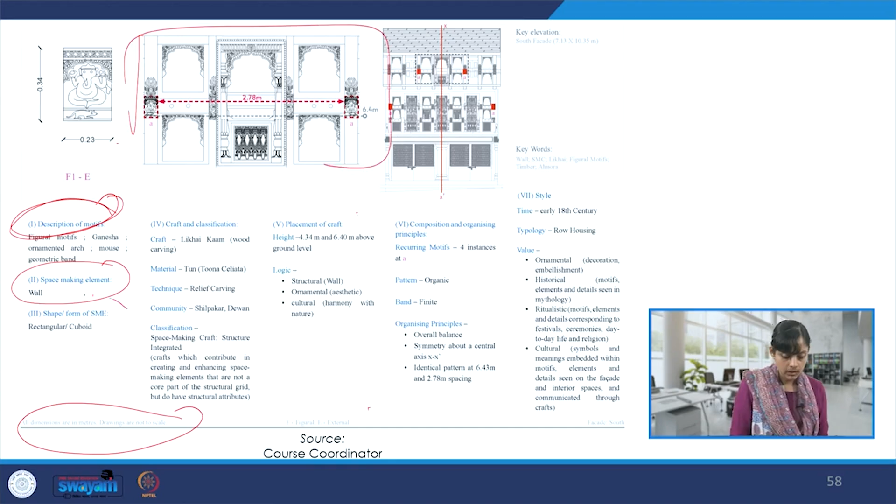So this is a sort of structure that I had given to this inventory. What is the description of motifs? What is the space making element which is seen here? It's a wall, rectangular and cuboid. The motifs are Ganesha, ornamented arch, geometric band.

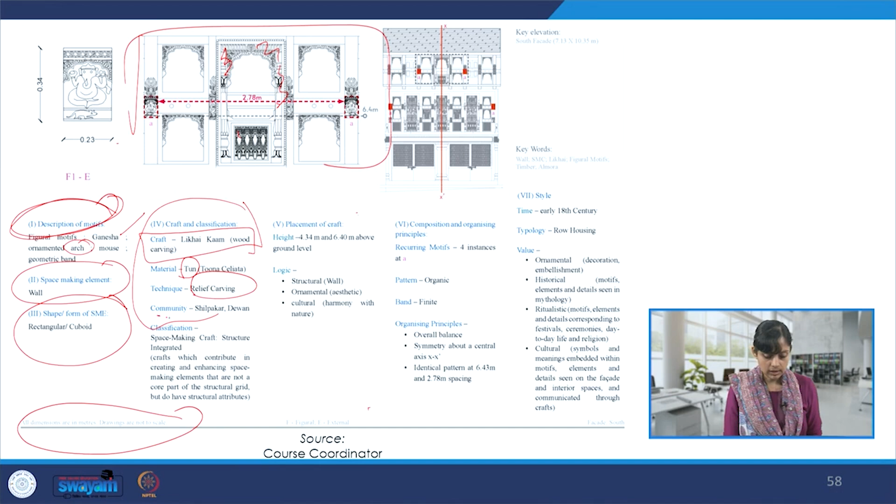What craft is seen over here is again the Likhai Kaam, which is the wood carving. The material is tun, a local wood found over here. Technique is relief carving, so within carving also there are different techniques. The community of Shilpakars or Dewans. So all of those details: what is the logic of it structurally, ornamentally, culturally, what are the dimensions, what is the placement of craft in terms of eye level. So all of that, composition and organizing principles.

So there is a recurrence of motifs at certain instances which are marked here at A, and so on. Pattern is organic or inorganic or geometric. And whatever we have been studying about elements and principles of design, balance, rhythm, etc. What style? So 18th century row housing, and what is the value matrix, or how do people see these houses or these spaces or these designs or motifs. So this entire analysis is done over here.

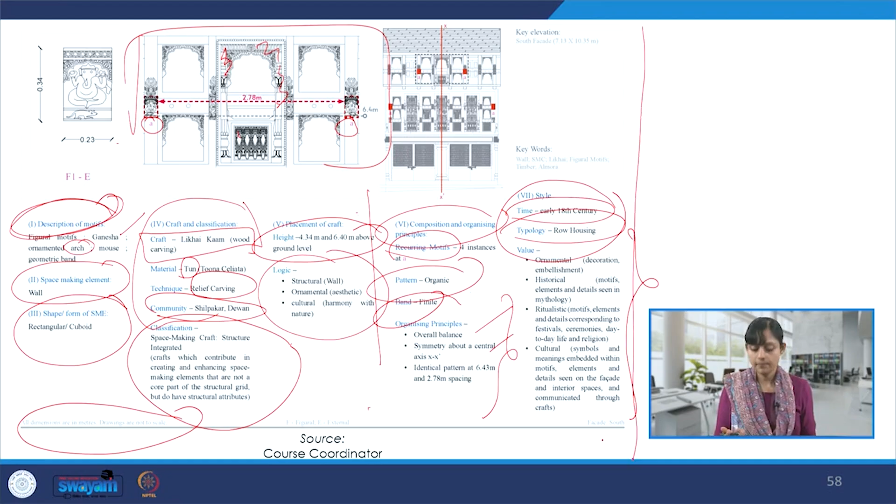This is the south facade. So yeah, with the help of SME and SMC, we can establish these kinds of organizing principles. We can understand, through working with makers, how things are put together in such a scientific manner with regard to form, function, placement, and organizing principles, all of these.

So next I will be summarizing this week's findings and learnings. Some of the references are over here.